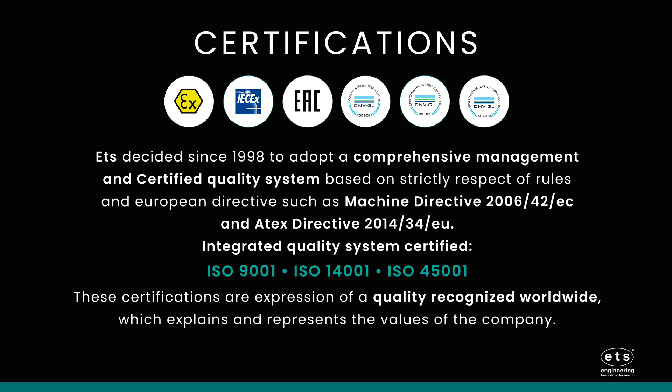To rationalize the consumption of energy and material resources, promoting the reuse, recycling, and management of waste or materials, directing it to the circular economy. In addition, as far as possible, avoid or limit the use of aggressive products, emissions, and spillages.

Sustainability means meeting our own needs without compromising the ability of future generations to meet their own needs. In addition to natural resources, we also need social and economic resources. Sustainability is not just environmentalism. Embedded in most definitions of sustainability, we also find concerns for social equity and economic development.

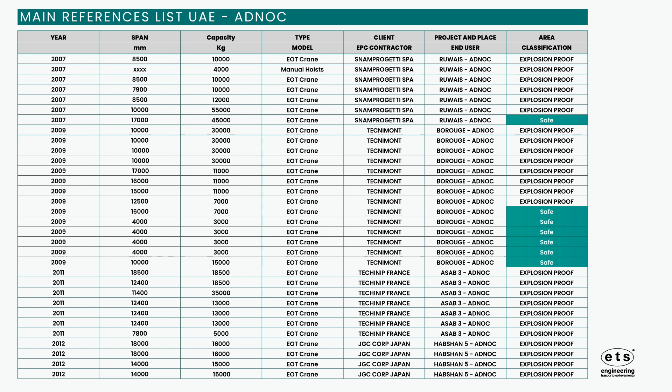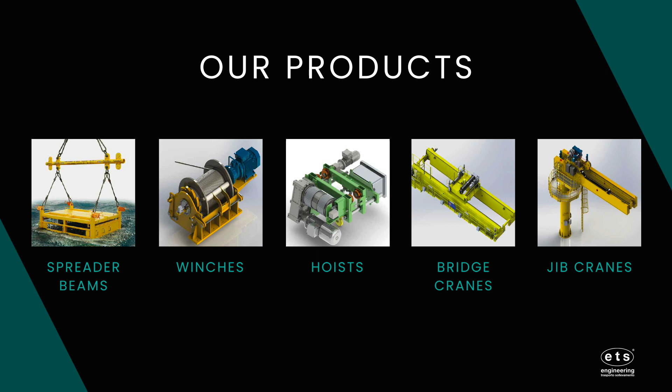ETS Engineering SpA, besides the design and production of cranes and hoists in accordance with Machine Directive 2006/42/EC, is specialized in the design and production of cranes and hoists in accordance to European Directive ATEX 2014/34/EU and the IECEx.

ATEX Directive 2014/34/EU is a directive that applies to protective systems against explosions, as well as all equipment used in or related to explosive atmospheres, such as electrical and non-electrical equipment, ISO 80079, components and safety devices, control and adjustments necessary for the safe operation of this equipment, and protective systems. The European Directive defines the essential requirements for the safety and health which shall be respected by all manufacturers.

Spreader beams are ideal for lifting very wide or heavy-duty loads. Spreader beams also help to control the load and, when rigged properly, can reduce the chances of load tipping, sliding, or bending, and also crushing or damage to the load because you can control the sling angles.

In modern industry, the spreader beam is classified to all intents and purposes as a machine, and for this reason, it must be certified and tested.

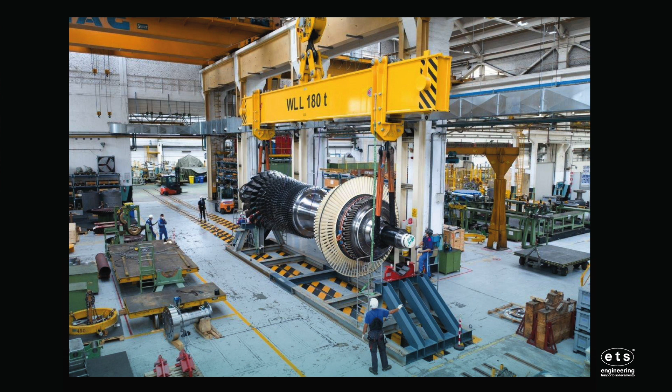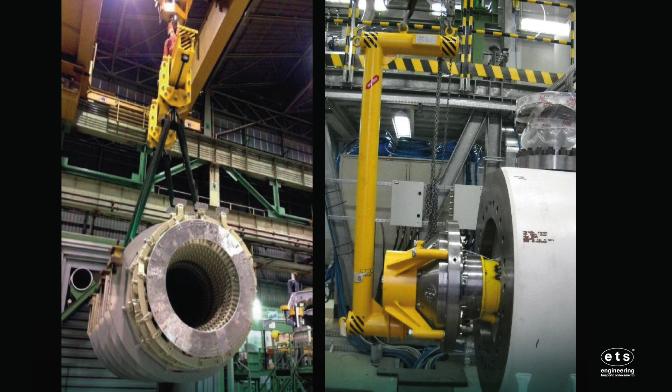It becomes a fundamental tool in handling operations for critical materials, such as turbines, compressors, tanks, complex skids, engines, valves, etc., which have significant value, and any damage due to the selection of an unsuitable lifting system can compromise the functionality of the product and block the activities on site with serious repercussions on times and costs.

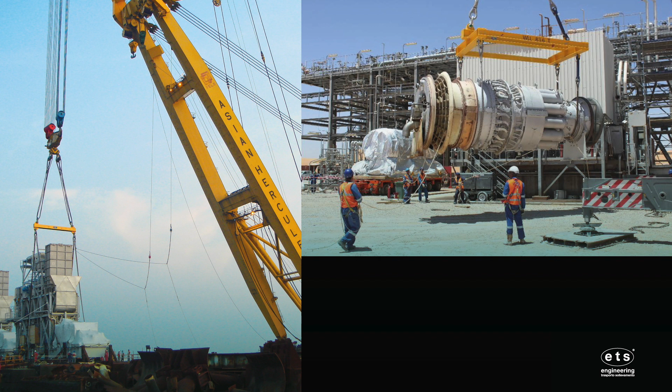They can be used in all sectors: industry, onshore and offshore, subsea. They are designed complying with EN 13155 or ASME B30.20.

ETS is able to design and manufacture spreader beams and lifting beams following client specification with bespoke solutions up to a capacity of 1,000 tons.

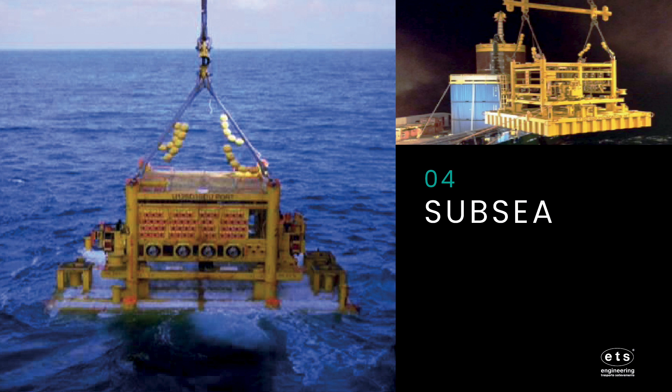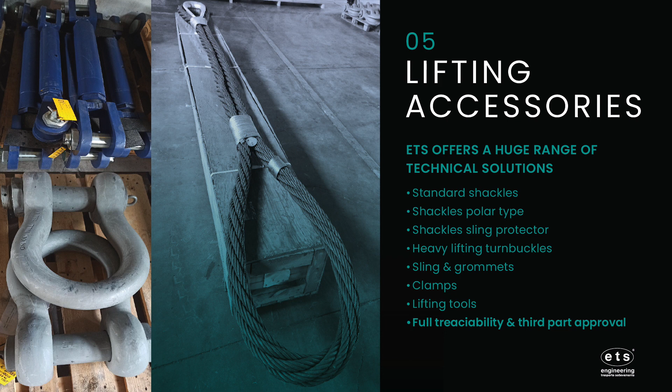Thanks to a testing machine and a test bed, both approved by Bureau Veritas, ETS can also perform load tests on beam structure and accessories such as ropes, slings, grommets, shackles, and turnbuckles.

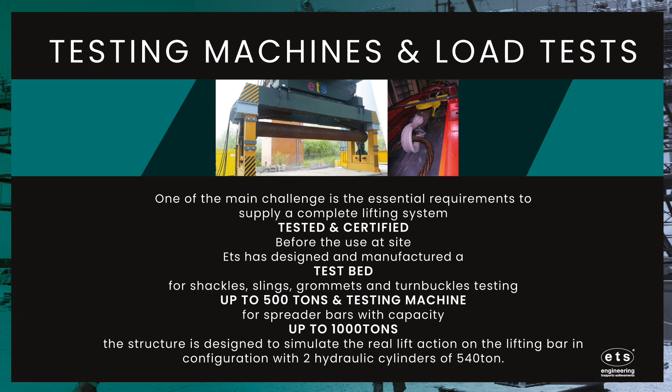Oil and gas is the market, where the paperwork sometimes weighs more than the actual winch, price is not unimportant, but safety, compliance with safety rules, documentation, and reliability are paramount in this sector.

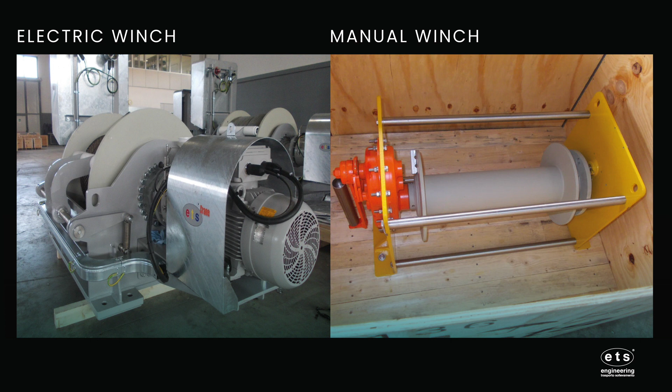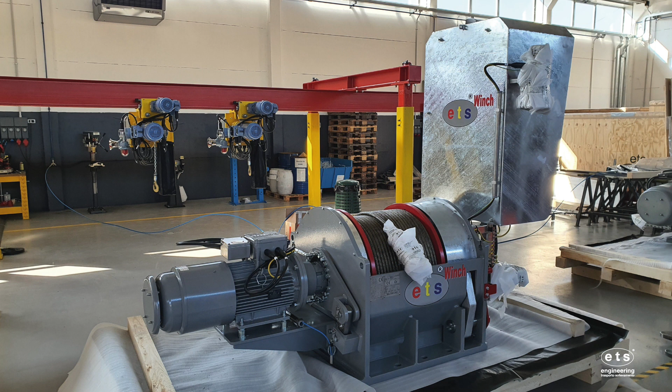Winches with electric controls can be designed and produced to comply with the rigorous standards typical for this type of industry. Our winches provide solutions for lifting from 100 kilograms to 150 tons, and are electrically or manually driven, suitable to be installed and work in hazardous areas, alongside a comprehensive range of standard worm gear and planetary driven winches. We offer tailored solutions to suit any performance criteria and application.

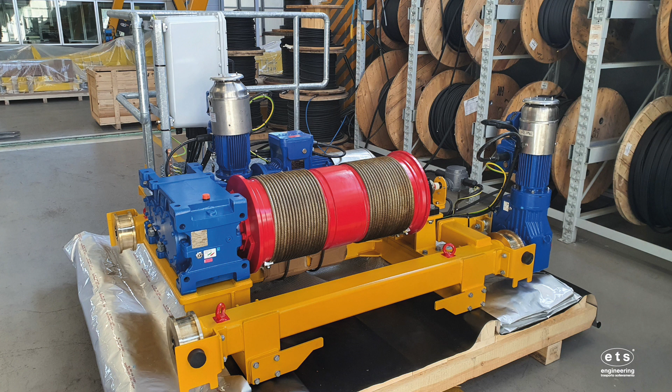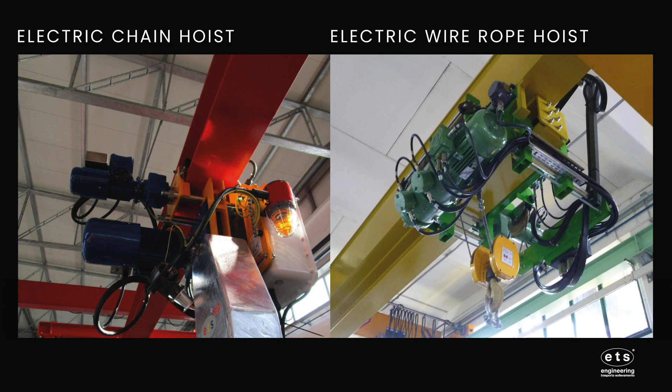We also provide complete design on 3D models, appraisal service, and FAT with third party witness, using our unique in-house test bed. The range of hoists guarantees maximum security for capacities from 500 kilograms to 3,500 kilograms.

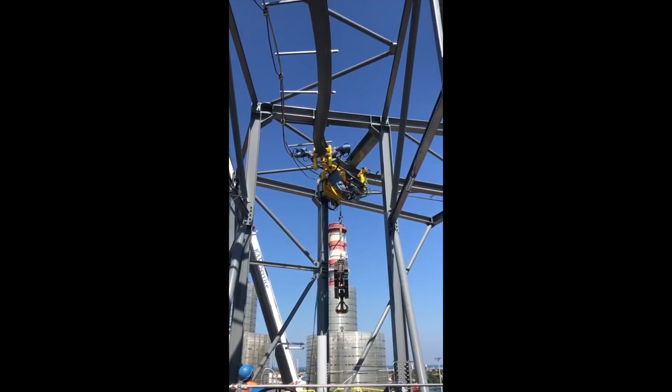What is a chain hoist and why choose it? A chain hoist, known as a chain block, chain fall, block and tackle, is a mechanical device containing a hand chain and lifting chain. Typically used vertically, it raises or lowers a heavy material by pulling down on the hand chain. A small pulling force is turned into a larger force to handle heavy objects thanks to the lifting mechanism.

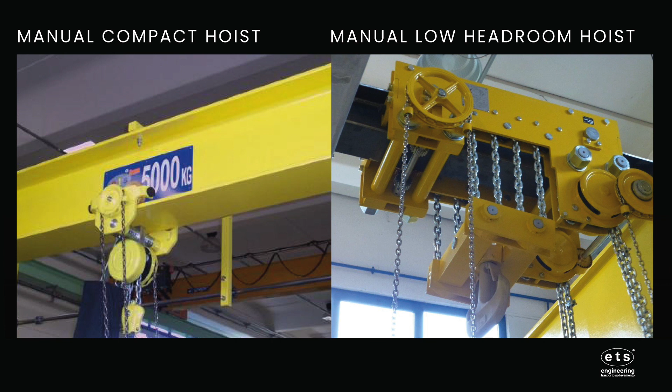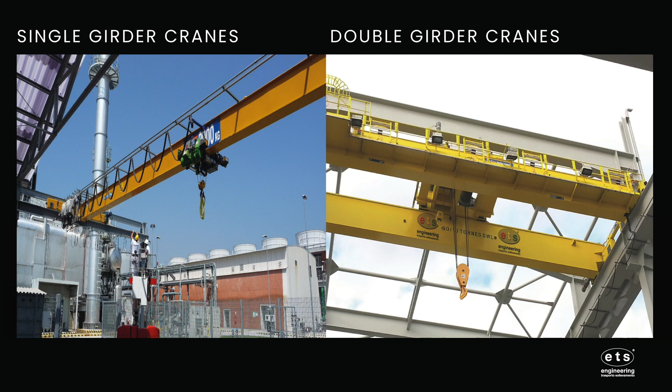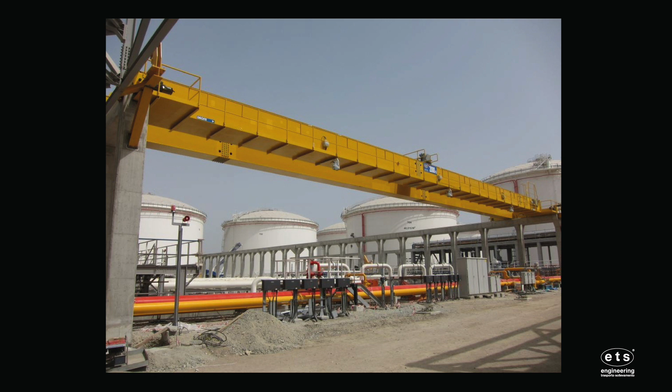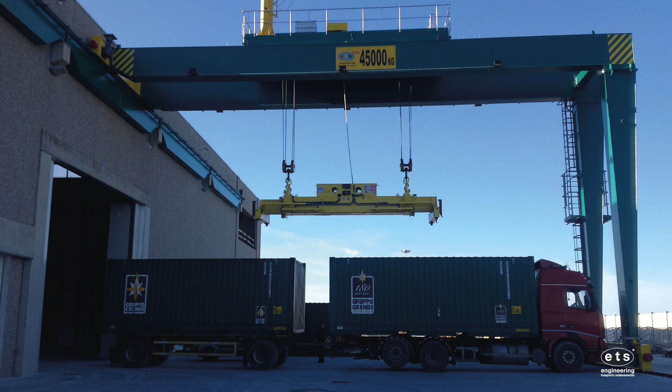Power plant, transport industry, construction industry, petrochemical industry, chemical industries, steel plant, foundries, textile industry, cement industry, assembly line, paper and packing, petrochemical, shipbuilding, fertilizers, offshore platform and vessel, LNG terminals.

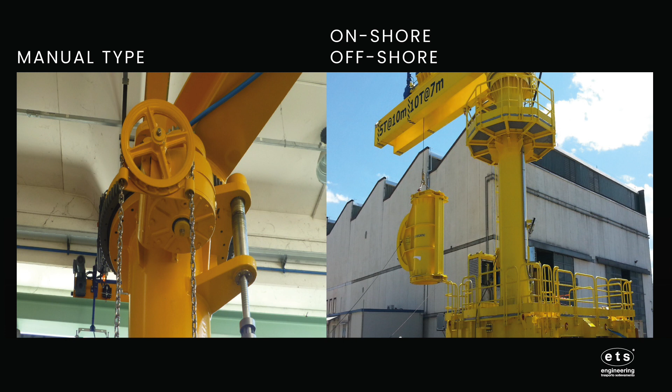Manual column and wall manual jib cranes. These cranes are characterized by the jib rotation lightness obtained by a special bent steel section or double T profile. The jib rotation is regulated by a registrable braking device. Two kinds of jib cranes are manufactured: wall jib cranes and pillar jib cranes.

ETS Automatic Handling, Waste Treatment, Sludge, Ash Handling and Biomass cranes are fully automated, versatile, and reliable cranes with a compact and robust design.

Precise and safety positioning and slack rope prevention reduce hazards and improve crane performance. Adjustable speed range optimizes the speed of your crane according to the weight of the load. Our specific software enables fully automated control of the working cycle to optimize handling efficiency and reliability.

Remote monitoring collects operating data, providing main information on crane status. Load visualization, control by keyboard, mouse, or app. Messages with warnings and alarms. Travel movements on X, Y, and Z axis are shown in motion. Display of the filling levels. Operating hour evaluation for all drives: crane, crab, trolley, hoist. Intuitive user interface.

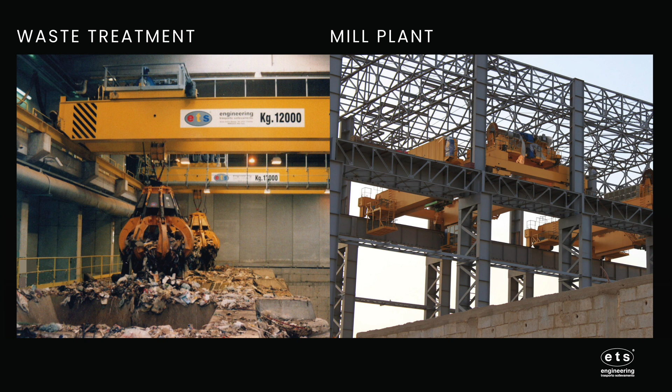Cranes play a decisive role in modern plants, where demanding environmental rules and guidelines are applied. Therefore, it is essential that handling devices operate always at maximum efficiency from the beginning of the process up to the final stage. We develop different process configurations, from semi-automated cranes to fully automated cranes controlled remotely, ensuring simultaneous tasks to comply with production plans throughout the entire process. If cranes stop, the process is paralyzed and production stops.

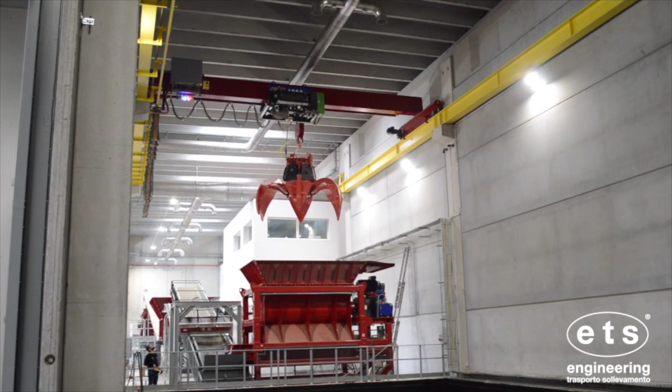We provide specialized maintenance services and spare parts. We use many commercial worldwide brands easy to find in the marketplace. This assures the fastest way to install spares when needed and reduces plant downtime to a minimum.

Our first aim is to guarantee the highest standard levels on safety and productivity of our customers' operations. That's the reason why preventive maintenance is an essential part of the job, to preserve the system always at the top. We can create a maintenance plan based on your equipment, application, and duty cycle.

Our subsidiary company in Norway, VDA Lifting, is dedicated to the offshore market. They offer certification and maintenance service, as an enterprise of competence with certified personnel and equipment supply, like pedestal hydraulic cranes and hydraulic winches for lifting and pulling purposes.